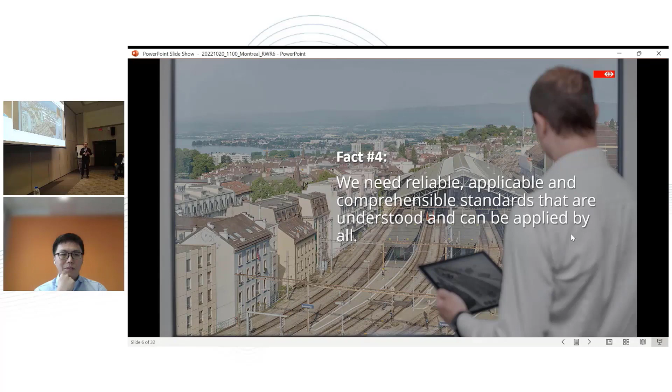Leading to fact number 5. As I said, we are a public company and we need to minimize risks in everything we do. We have a lot of pressure monetary-wise. We have to save, for example in the BIM program, 200 million francs a year starting in 2025 by using digital standards. I'm not sure exactly, maybe 200 million euros or 250 to 300 million Canadian dollars. That's quite a lot of money we have to save using digital methods. And we have controllers behind us who want to see these figures, so that's not a very comfortable position.

The most important point is we do build for operation. As a client, we don't care—well, of course we care about the planning and construction—but we need a standard for the operational phase of our assets and for the interconnected phase in operation.

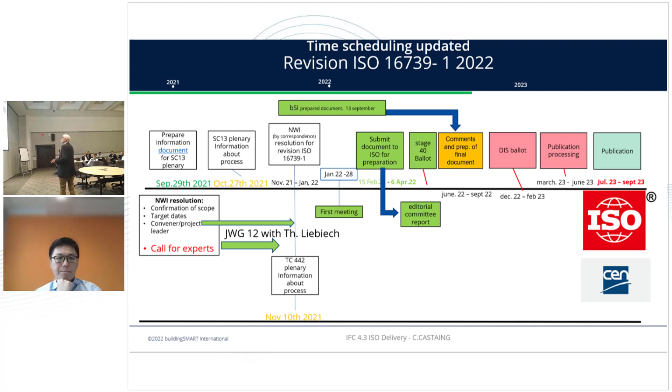So what happened between June and the 13th of September? We created this editorial committee and had several meetings to verify the content of the documentation delivered by buildingSMART, and to verify it is in line with specifications coming from ISO. The last step for the editorial committee, which worked throughout the summer, was the 6th of September, when we decided on the list of modifications to be embedded in the documentation provided by buildingSMART. Based on that decision, on September 29th, Joint Working Group 12 decided unanimously to go to the DIS ballot.

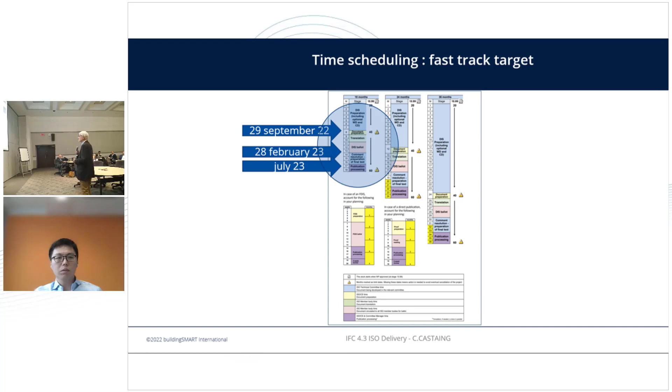I want to report also not only on the process, but the content of the process. Next slide, please, John. It's not moving, huh? There is something.

So, by memory, we had a discussion split into two parts. The first was to verify that the HTML documentation is working together with the different parts of the chapter, but also with the criteria to verify if we can obtain continuity between IFC 4 and IFC 4.3. We considered the target to be that everything working in IFC 4 has to work in IFC 4.3. This is very important because the quality of the standard depends on it. If we make the difference between authoring tool and property schema, we need this continuity so as not to break what is done by software vendors and end users using the standard.

So we proceed in this way to start with the content of the documentation, where we have a part - chapter 8 or 7, I don't remember, it is on the slide - with all of the change log. The change log explains in the documentation what are the modifications of the structure of the standard, and then to verify if we are creating a break in the structure or not.

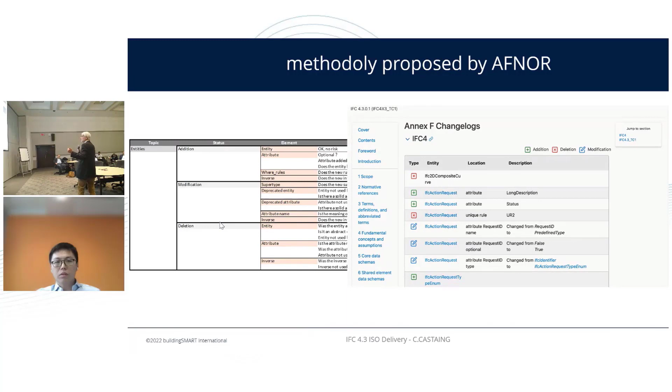So this work was done during this summer, and the result is on the next slide. That's the list of modifications on each entity needed to verify this continuity - what has to be deleted, not deleted. Deprecation was mentioned, and modification is about whether it is in line or not. Because, for instance, if we change the place or rank of an attribute, you change the compliance with the standard. So we verify that, and we come back about that. The list of modifications there.

Next slide. It's not so much - in terms of quality, it means that it's normal to have 10 to 15% of modification of that. It was less than that. So that means that it's also proof of the robustness of the standard.

And we made a second type of modification. It was what we discussed with Jim about the editorial aspect. Editorial aspect would mean only explanation about the content, and we make some improvement to be more clear about the impact of this standard on the domain and so on. Mainly, the main modification was regarding the explanation about the implementation of alignment, geodetic, and so on. It was important in the process because it was a way to give confidence to the expert of ISO about the quality of the standard, but also to have some explanation of how to use the documentation. It's really a way to facilitate the approval.

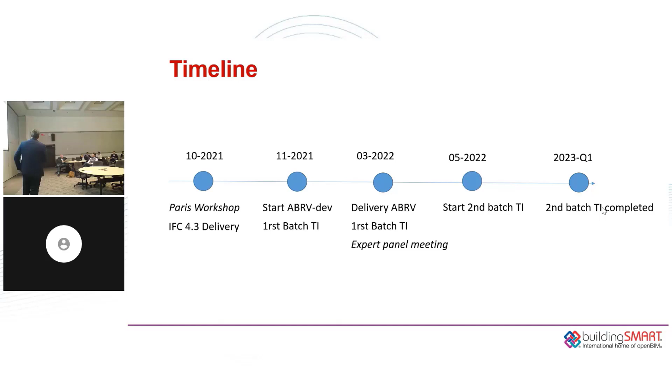We decided to have two kinds of batches for the test instructions, because we had too limited time to make test instructions covering all domains of the alignment-based reference view. So we started with the basic ones, really typical for IFC 4.3, demanded also by domain experts for rail and infra, and then going a bit deeper so you understand what I'm talking about.

As we were moving forward, there were a lot of developments also inside buildingSMART International in terms of software certification services. Now the delivery we had in March is being reviewed and fine-tuned by the implementers team, in order to define the final constraints for that. In the meantime, we're also working on new test instructions.

Test instructions are being produced now, which will be ready at the end of this year, for aggregate structures and pavement. There are also new test instructions planned for bridge alignments. So we have to stick to the project plan, and we hope to move on with this—Christophe will say something about that later on. You can go to the next slide.

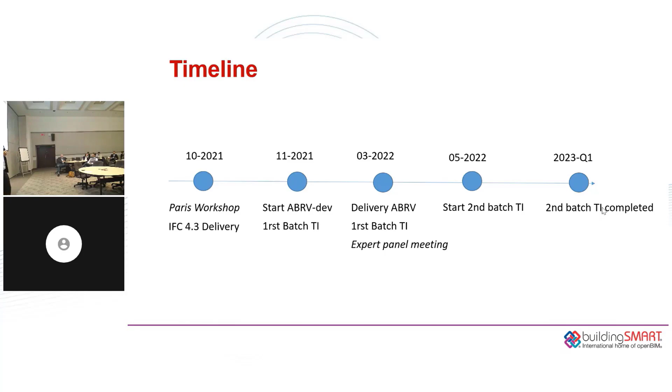When we talk about alignment—I was joining another session this morning from the rail room, and they had some business cases, and they said what's important for us is to have the linear placement. We have the horizontal alignment. We have to understand how some elements are positioned, aligned, and how they are linearly positioned. So it's about linear positioning, it's about geo-referencing—these are very typical things important for both the infra room and the rail room.

If you look at it, there's a lot of overlap, but there are some specific differences. In the infra room you also have principles about super elevation, and for rail you have the cant. Super elevation is about having some vertical differences, and the cant is about having an angle in your alignment which you should take into account.

It was important to have these principles specified as part of the alignment-based reference view, so this should be implemented by software vendors and understood—meaning software vendors should understand where to find the specific relationships inside the IFC4.3 schema, mostly represented by concept templates. So it's a matter of defining the concept templates we will need for the alignment-based reference view, and some extra constraints for doing this.

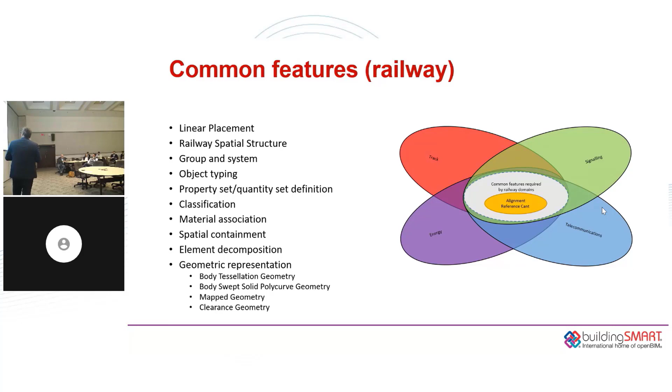So in effect, the alignment-based reference view is now a selection of concept templates, available for everyone. I have put a link on this in the sheet. From the fundamental concepts, these templates are part of the alignment-based reference view, part of the reference view. There will be some extra constraints, now being discussed in the implementer forum in order to finalize that.

At the beginning of the presentation, I talked about test instructions, because the test instructions are also provided as part of this development.

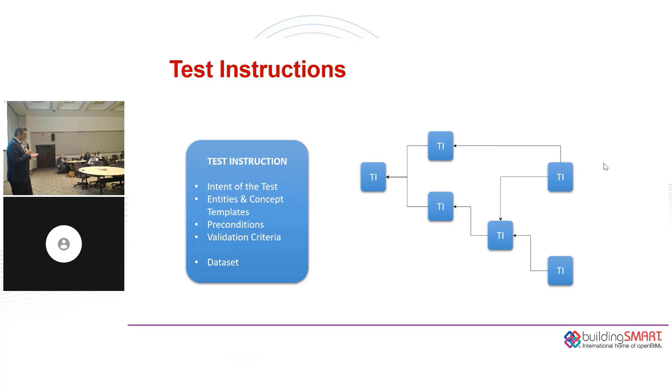The test instructions all have the same format. It says something about the intent of the test, what kind of capabilities are tested, and whether it's an import or export test. It says something about the preconditions and the validation criteria — what is being validated, which kind of rules, and what kind of output is expected from the validation process. Sometimes a data sample has been provided for that.

Test instructions can be either standalone, or at least for the rail domain, based on previous test instructions. Test instructions are built on previous ones, so that you as a software vendor can follow some steps — how to build up your implementation, and how to test that these things are working — and build on that using these sample sets. You can use the same sample set and test accordingly.

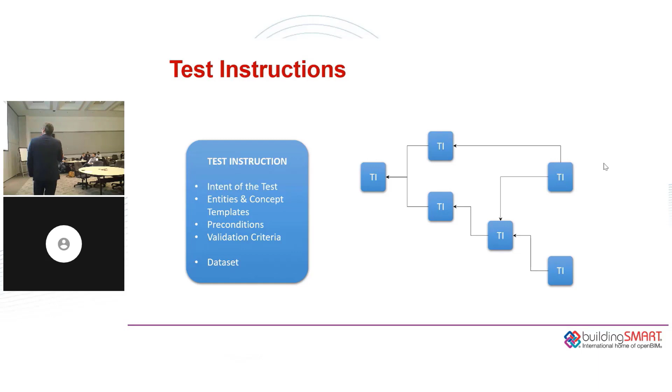Yes, the test instructions are modular and configured, so they can be expanded each time. If someone is saying they would like to have something tested, then we can make additional test instructions, and it can help both the software vendors and the stakeholders to understand and align the expectations about that.

But it doesn't say anything - it doesn't change the alignment-based reference view as being the specification of what should be implemented. It's only helping you to understand if something has been implemented correctly.

Here there's a GitHub repository where you can find these test instructions yourself. I have some examples of how it looks like. It's very specific, specified.

For instance, this is an example of two alignments without cant. The thing is, how should you, as a software vendor, know where you can find and how you can validate that you are able to produce these two alignments?

It's starting with the scope settings. This test instruction is saying about the export of the data based on the implementation - what kind of entities should be used from the IFC schema, what concept templates should be used for this one. So it's very specific.

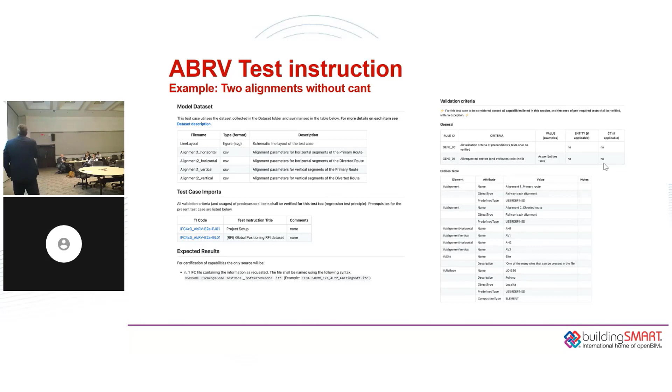And then if you go to the next slide, it says also something about the model dataset which can be delivered, so then everyone can check it themselves, and also the expected results. There are some tables with values which you can check to see if this works for you.

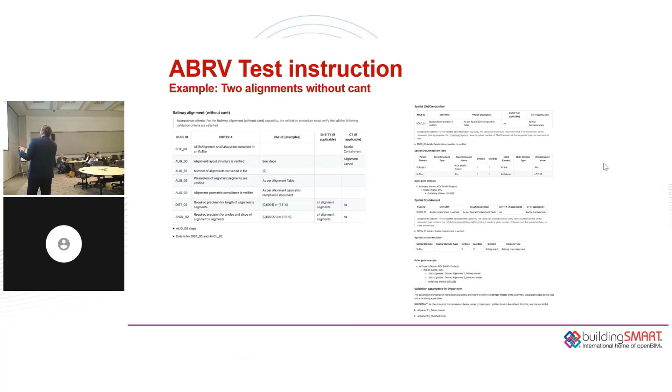This is something about the rules. So when we're talking about alignments, for instance, it says be sure that the alignment layout structure is verified. Because we are talking about two alignments without cant, be sure that you have two alignments in your file, things like that. And there are some tables showing the expected results.

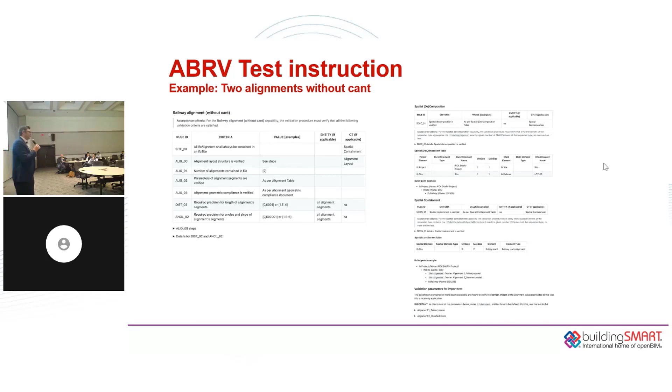So it's very specific, and should be easy for everyone to understand and use how this works. But as I said, it's not covering everything. It's just checking some principles which are important for rail and for infra room to implement.

So the last slide - alignment-based reference view is now part of IFC 4.3 because it's the selection of the concept templates which are inside IFC 4.3. It's already merged in its HTML documentation and published by buildingSMART International, and currently it's being reviewed and fine-tuned by the software vendors in the implementer forum in order to finish it.

And this is very important to have it implemented, so the various stakeholders from the infra room and rail room can use this and build their business cases on it.

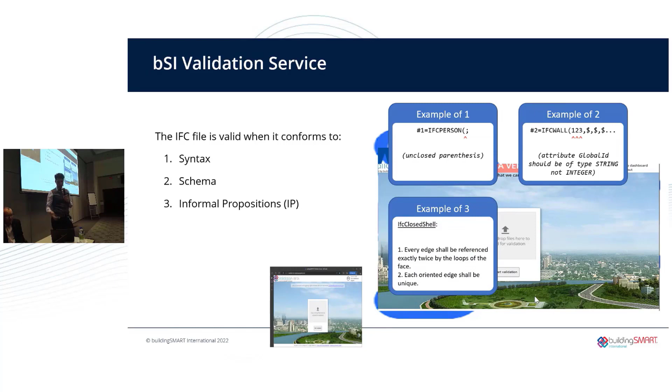Then there are a lot of other informal propositions or implementers agreements, meaning further constraints on top of the schema. They have various forms at the moment - sometimes simply text inside the definition of an entity, or informal propositions, sometimes concept templates, general usage, overriding concept templates. There are many forms, but the idea is there are two major distinctions. This is an example of a current informal proposition: every edge shall be referenced exactly twice by the loops of the face. Fairly complicated - there should be an image showing that, but something is wrong with the pictures. This is another one, the kind of agreement we find in the forum.

Agreements, for example, that there must be exactly one IFC site. At the moment there's a list of agreements - a list of plain English agreements. What we are trying to do is transform them into rules that can be read by humans and machines, so that the validation service can automatically check that the file actually has one IFC site.

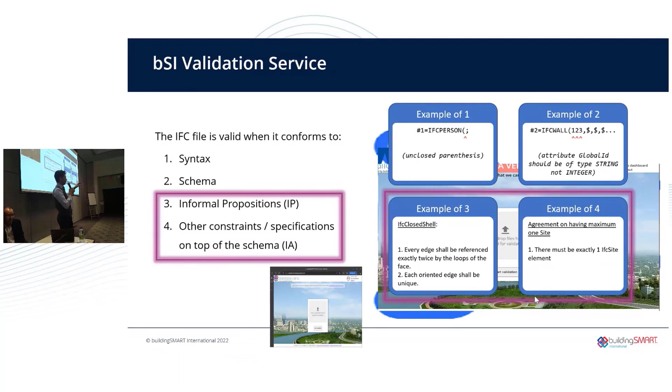So what the validation service is focusing on at this moment are these two: implementers agreement, informal proposition, concept template, general usage - whatever defines further the alignment-based reference view.

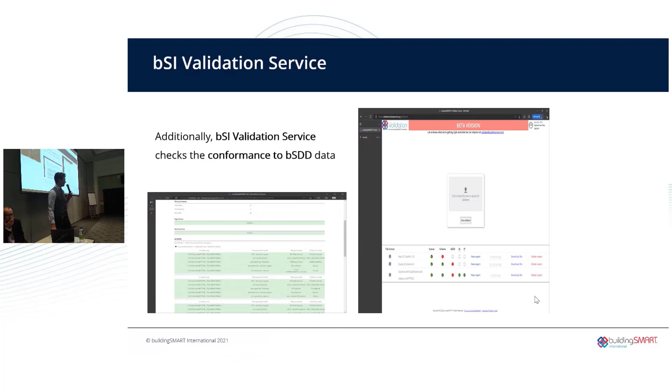Additionally, probably not as important but good to mention, the BSI validation service checks conformance with BSDD - this is more user or project focused. That's the image from before, something messed up with the image - that's the face looping twice. Just to let you know, the validation service can check the file against a BSDD. In short, if a file comes along with some definition of a BSDD and a URI pointing toward a BSDD domain, the validation service retrieves the domains from BSDD and checks that the information in the file is actually compliant with what is written in BSDD.

Again, something wrong with the image, but take a look at the diagram on the right part. So the second part of the diagram is that if you remember the first part, now you have the validation service coming into the picture. The validation service is using the rules defined by the implementers forum to check the IFC files.

To complete the picture further, what is the relationship with the BSI projects? Well, the BSI projects can contribute to the validation service by writing rules, and this is actually what Rail is doing. I think they will explain it in the next presentation.

So they can write rules, they can submit tests to the implementers forum, as Ronald was mentioning, and these tests are referencing those rules. They will create tests with a description, a title, a data set, and then they will list the same rules that the validation service will use to check the files, which are the products of the test itself. So by doing this, the projects are actually testing the standard.

And also can get some IFC sample files that are validated by the service at the same time. And most importantly, they will directly contribute to the software certification mechanism that is based on the BSI validation service, because the rules that the project will be making will be part of the same validation service.

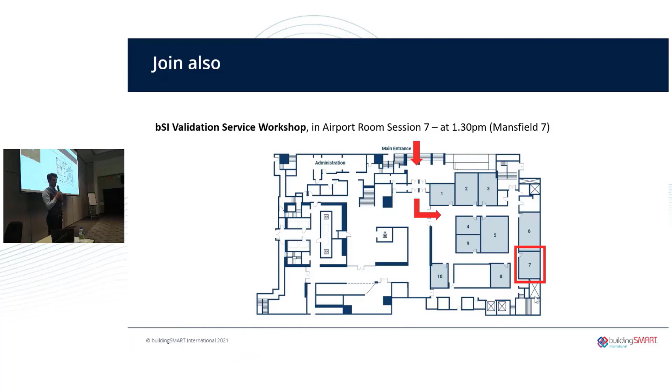If you've missed the presentation, the workshop, the bring-your-laptop session where you try to upload your file and validate it, which we had this morning, we are going to do a replica in one of the rooms below, Mansfield 7, 130, the airport room. They're going to host us for one of these workshops, so if you missed it, make sure to join and bring your laptop.

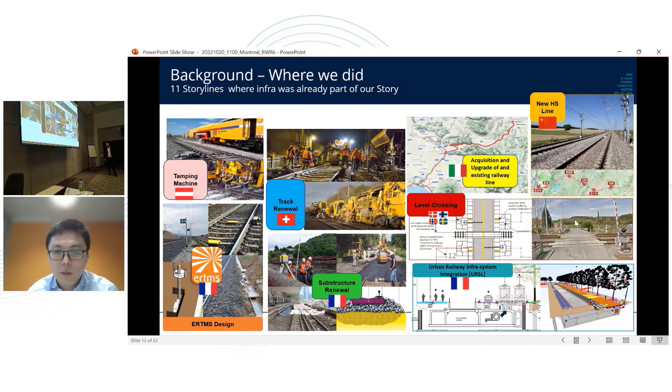Next. So we have done all these things, so what do I expect now? First of all, railway companies will very soon require IFC files as deliverables for railway infrastructure projects. We also expect functional software that supports at least BIM authoring and coordination for railway infrastructure projects - it's not only about the file, we need really useful software. As Adrian just said, we don't need people to have a PhD degree to understand this IFC file. We really need software to create IFC files and also process IFC files, and we also want to contribute to the general process at buildingSMART to qualify software implementation of IFC.

This is very much related to Evandro's presentation just now. This is specifically about validation rules for checking IFC files. In this project, we also expect the implementation for IFC-based business cases.

Okay, next, this agenda page.

This project is applying IFC 4.3 for rail. The project goal is to continue the very successful cooperation and collaboration with software vendors. We need to support the methodology for defining requirements, implementation, and validation. So this is about the method, the process work, and also the tooling.

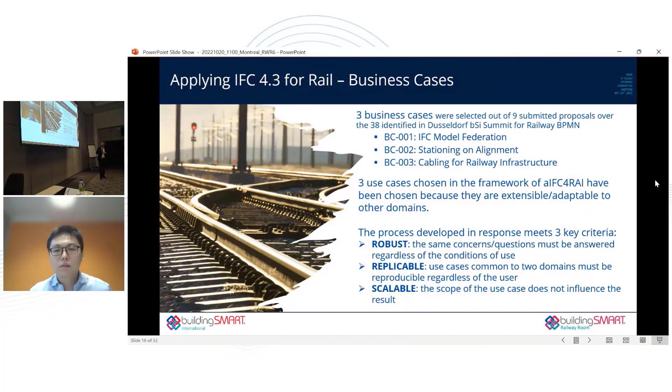If you can switch to the next slide, I will go perhaps a bit more into the details. When we are talking about the federation of models, it's very focused on the subsystems of the railway - we're talking about energy, track works, signaling, telecoms. The key message here is that when we talk about this within our own railway system, it's okay, but we are facing challenges, and we think the challenges we are trying to solve will be the same if we enlarge the spectrum and see what happens with buildings, what happens with different systems around.

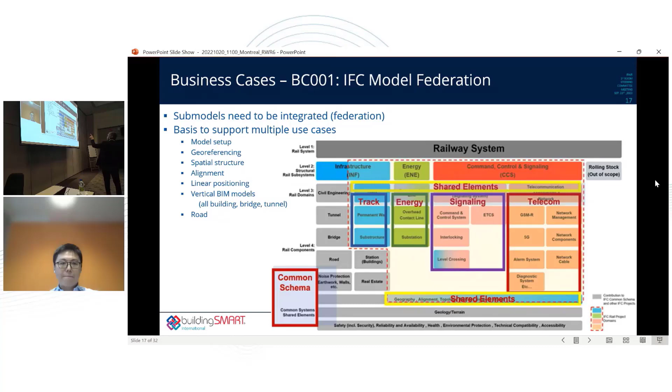So at the end, the methodology that we'll develop within this one-year program, we think that we can reuse it, and we need to also feed back this process with the other domains. This is again talking about model federation. We have this process map detailing what we expect, which will be detailed by Shi in the last part of this presentation. So that's an example of what we did and the objective of this model federation.

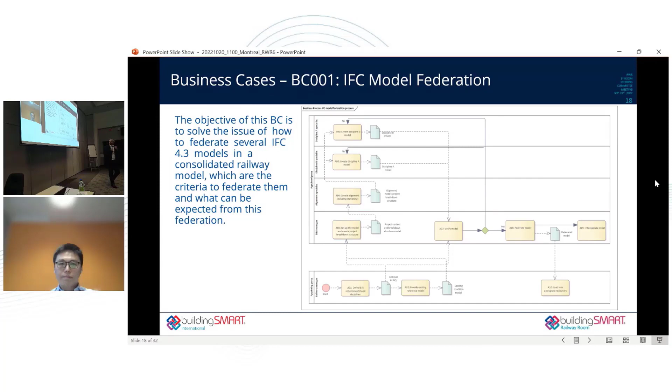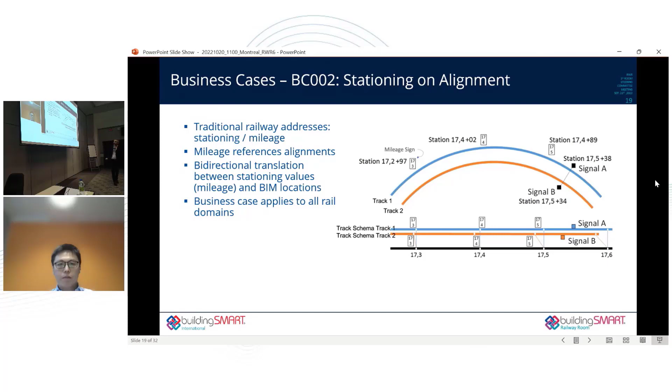The next slide is showing the stationing, the one I just gave you some details about. It's very key, very crucial for the track work and railway industry to have something fit for this very special purpose. It can be applied to bridges, tunnels, perhaps the tarmac of the airport, or many things. The only thing is, with railway, we have this challenge of having one track, another track, perhaps a third track, perhaps something crossing both. That's where we think we can bring something to other industries, because we have perhaps the most constrained environment for this question of what I call chainage, what others can call mileage, or we can have this discussion about the wording.

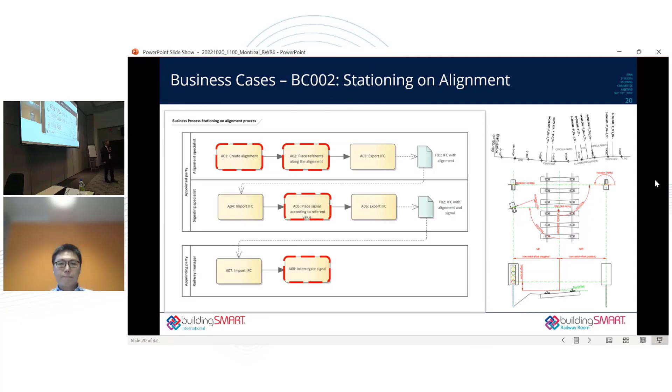And the last one is to interrogate the equipment. It can be a signal, it can be many things around drainage items. Here it is to interrogate this item and to have the right information, basically to have the XYZ and also the mileage based on the track.

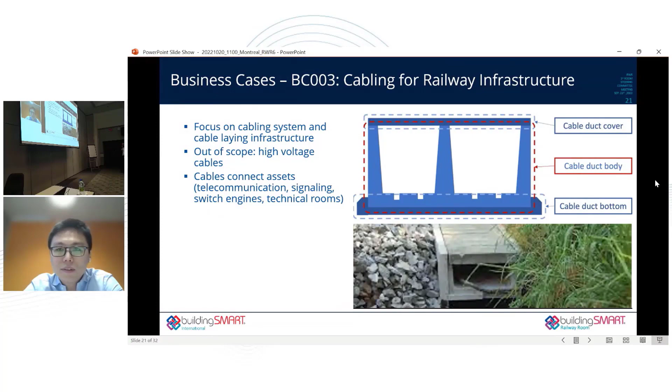That's the last slide. So Etienne, I guess, could go to the next slide. Yeah, don't have the... yeah, thank you for that. That's the layouts and the challenges we have. Yeah, I'll let you finish. Sorry, okay, I'll try to catch up very quick.

Okay, that's the first part about the project method. One part of this project is to define a method. So we have these three business case works, and also we need to have a process to define the requirements for these business cases, and then continue this process to implementation, then to validation.

We also get a lot of requirements and challenges from stakeholders about this method. First of all, this method needs to be general, applicable not only for these three business cases, but also usable by stakeholders to define further use cases. We expect to use this method to support defining requirements in contracts. It should also support automatic rule checking for IFC files, support defining requirements for functional software features, and ensure the quality of this process. It should also ensure traceability between requirements and validation methods. These are all the requirements and challenges that we have received from stakeholders and domain experts.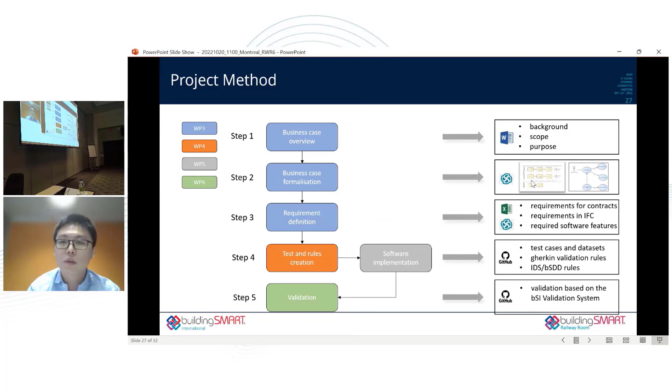So regarding tooling about these things, for the first step about the business case, we would use just a text document about the background, scope, and purpose. Then for the business case, we would use Enterprise Architect to define process maps and also define use case diagrams. Etienne has already shown some process maps.

And then we would go further to define requirement definition. We will also use Enterprise Architect to use SysML to define requirement diagrams. Then all these things will be linked to test cases and rules. We would use GitHub, mostly the GitHub from the Implementer Forum, to define test cases and data sets, and also use the BSI validation system to define gherkin validation rules, and possibly also IDS and BSDD rules.

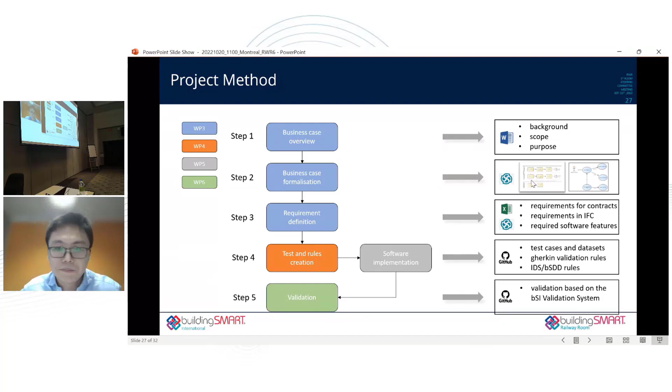This is some challenge actually, we would like to coordinate between the business cases, because there would be a lot of redundant requirements. So we would like to keep the requirements consistent among these business cases. This will also make it easier for us to define test cases, and later on also for software vendors to more straightforwardly create IFC files. So we need to do some coordination.

So all the requirements are collected in a central repository, which we call the requirement specification. Based on the requirement specification, we will define test cases and data sets, and then create rules to check the produced IFC files. Next.

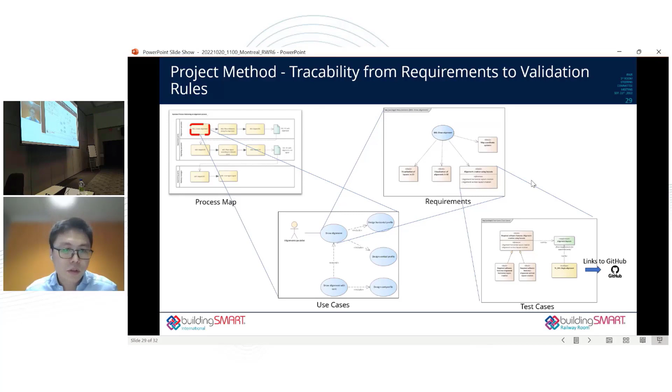This method also ensures traceability from requirements. From the process map, we trace the process map to the use cases, and each use case will have specified requirements, and then requirements are linked to test cases, and test cases are linked to all the specified data sets and specified rules on GitHub. So we use this kind of way to ensure traceability from requirements to validation.

So the next step is that we have all these business cases ready, and also this method. Of course, during this process, we will continue to improve and further specify the business cases and also improve this process. Now we really would like to call for participation.

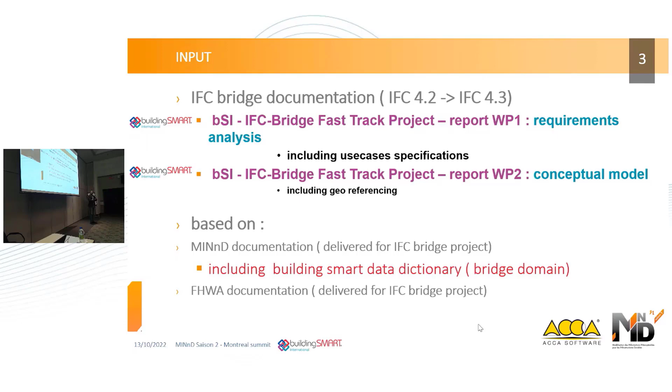Next one, and I think this will be very, very important — the final step of this project. So what are the objectives? To define the exchange requirements regarding the question of alignment and georeferencing and what is specific for bridges.

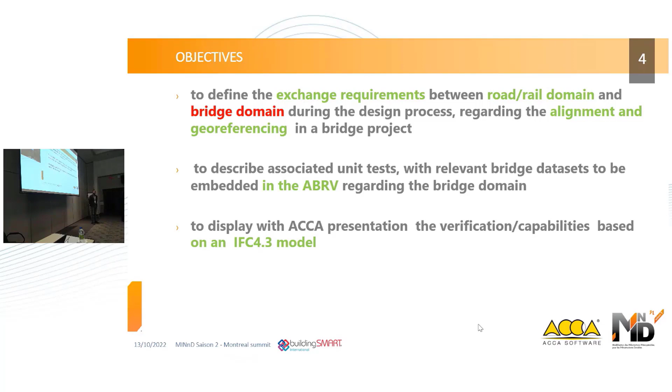What we are going to show is something important, representative of 70% of usual bridges. It's not very special, but it's very important because it verifies that for existing assets, it could be used relevantly. And that is very important.

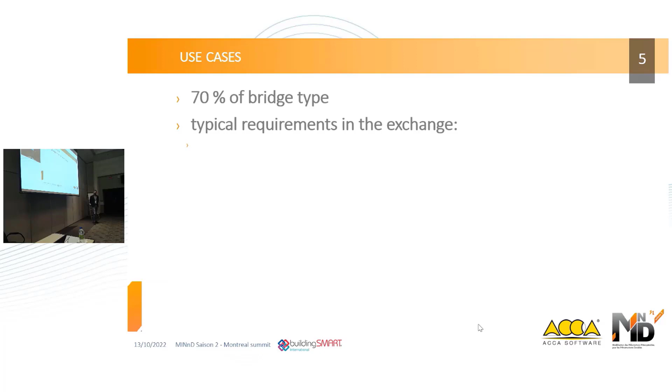And what we are going to show is what is very typical in terms of requirements to be exchanged with the different steps of design. So I'm going to show what we want to test, and we will verify with Michelangelo where it is.

What's very important to show is that on the bridge you have two alignments, at least two. The first one is the alignment coming from the road or the track, and the alignment of the bridge itself. That's second, and that is very important.

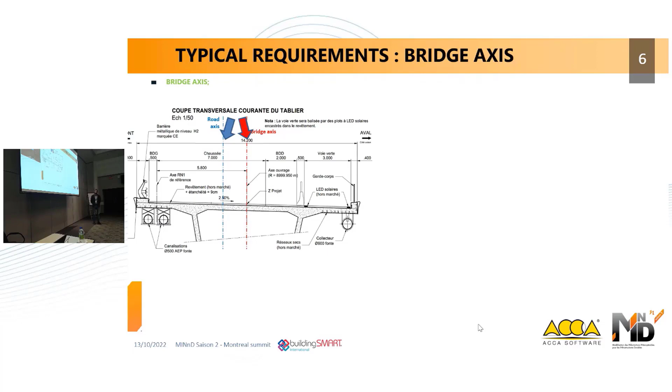Then you also have some other elements of alignment.

You have on top the level and the alignment of the road, including pavement. If you want to apply that to the bridge, you have to take into account that the bridge is designed without the pavement. All of the references are not related to the red line coming from the road, but to a dedicated red line deduced from this one, which is what we have to test.

That's the reason we say there can seem to be some redundancy, but in reality there are details to be verified. So take care when talking about redundancy of the test, because as was said, the devil is in the detail.

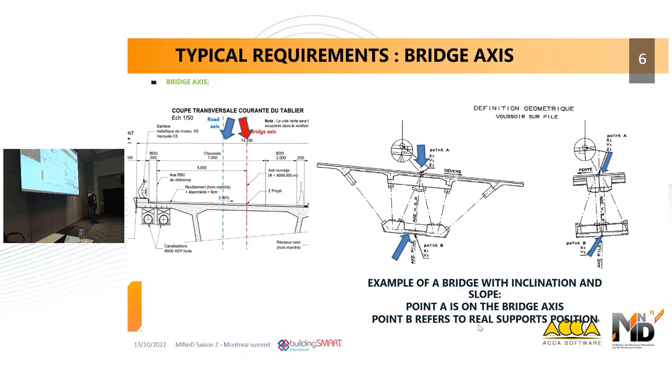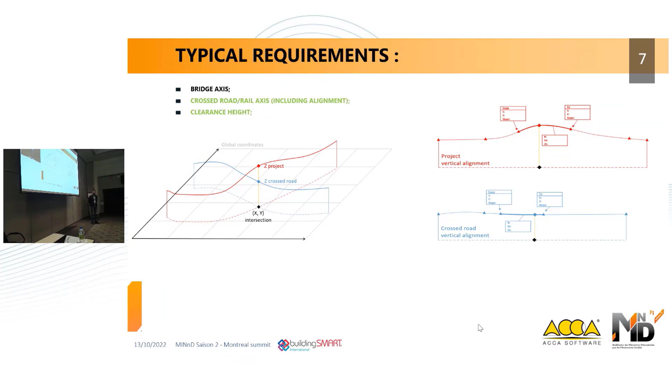What we also have to verify is that a bridge goes across something. So we need to be able to verify the clearance between the existing structure and the new structure, regarding the verification about the crossed road and the vertical alignment.

And also about the clearance, orientation, and so on. So we need all of this detailed information combined with the existing, sometimes existing, or another structure regarding that.

And then on the bridge, you have at least three references. The first one is the global coordinate geodetic—it's not Cartesian. I want to insist on that because there is confusion in the IFC documentation about it. They are using IFC Cartesian to speak about what is not Cartesian, but geodetic. I think that will cause some trouble in the future with that. We have to take care about that.

You have the local Cartesian to be used, of course, because most structures are designed in a local coordinate system, and we have to represent that in the global geodetic coordinate, plus the linear referencing.

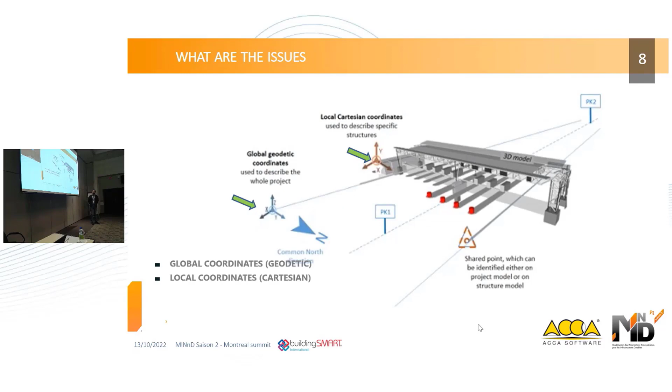In linear referencing, you have stationing and chainage, but you also have measuring. We are going to show that with Michelangelo—chainage, station, linear placement along the road/rail.

So the next presentation will be in three parts. The first part is to show the spatial decomposition of a bridge. Secondly, the aspect of georeferencing. And third, the question of reference to the semantics of the bridge and so on.

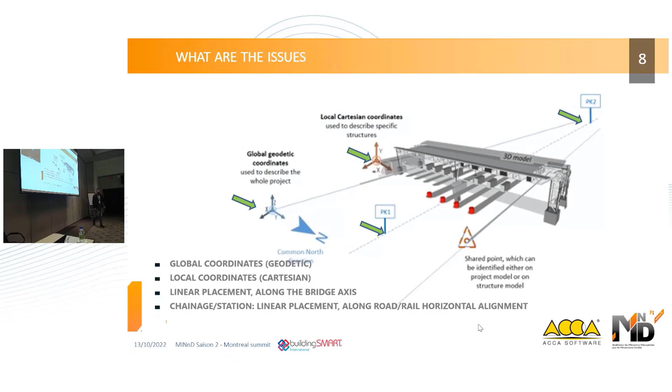Thank you, Christophe.

So yes, let's start with the bridge spatial structure and the object decomposition, which I think is quite an easy thing. Next slide—it will be a video, if you can play it, please.

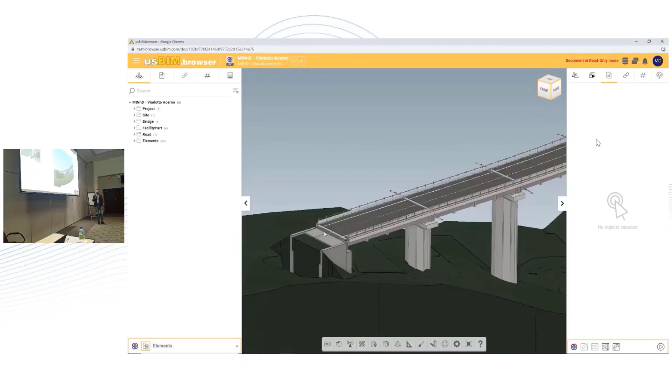This is not the video, of course. This is it.

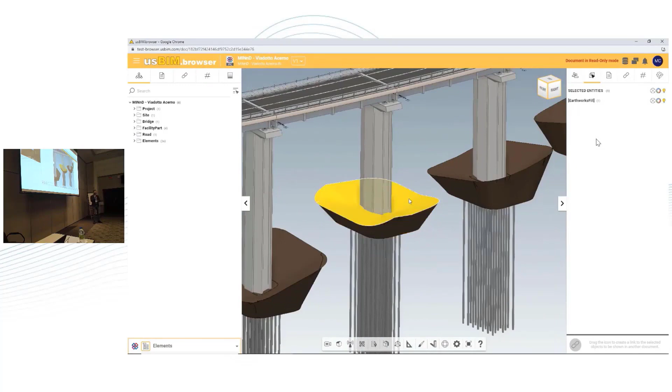So what we have done is taken the test instruction from Christophe, and we tried to implement it, given our experience in other IFC 4.3 projects of rail and infra. The good thing about this standard is that the same concepts apply regardless of the kind of linear infrastructure you are designing. So alignment and other stuff will have the same meaning, and we will see this in the examples.

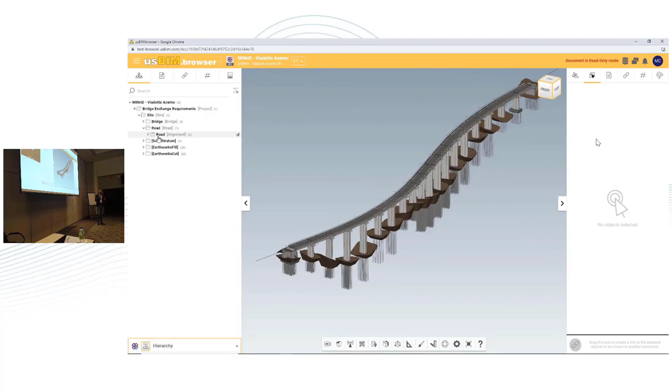What we have done is try to implement those concepts from the test instruction. Let's start with the spatial structure, which with the new standard, IFC 4.3, is very flexible. There is nothing special about it in this example because there is no special need for this model in particular, but based on your use case, the user can go as specialized as he wants.

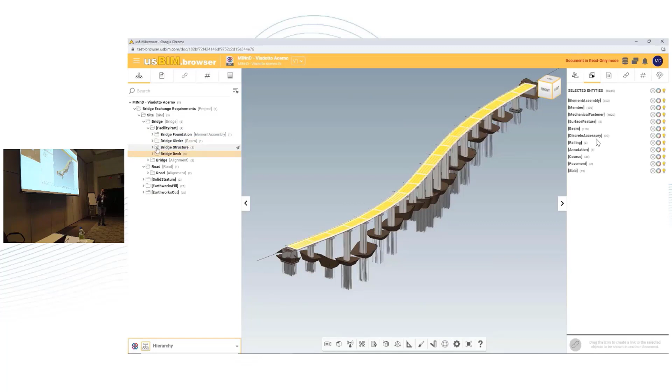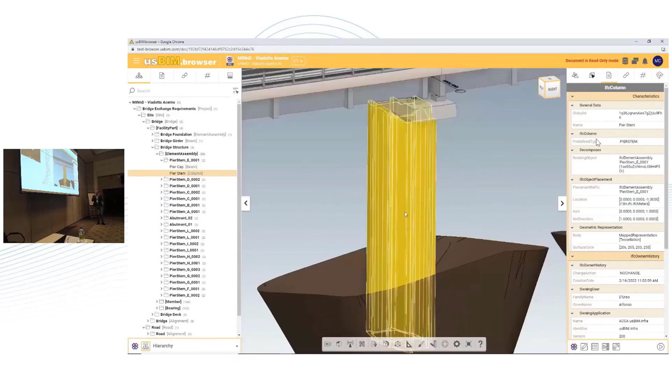Here we have only the bridge foundation, girder, structure, and the deck as facility parts of the IFC bridge. And then we have object decomposition, so each element assembly is part of those spatial structures, and may contain different objects. For example, for the bridge structures, we have the assembly with the pier cap and the pier stem. Everything is mapped according to the new schema, so classes, predefined types, attributes and so on are the proper ones. This concept of object decomposition and spatial decomposition applies to every part of the model.

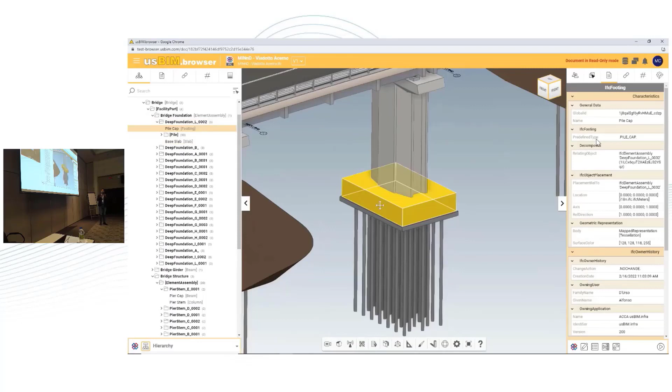Here we are at the foundation. Again we have the assembly, and here we have a decomposition of the pile cap, for example the base slab, and each pile in this example has been designed on its own. Again, everything is mapped according to the new standard. Nothing special here.

Why could we start with that? Because the question of decomposition means that everything we're going to show after that has to also be applied for the full breakdown of that. That's why we are specific in the test instruction, and where the difficulty comes for the next step of the project is to define the methodology of testing and to accept the result of that. That is still to be done.

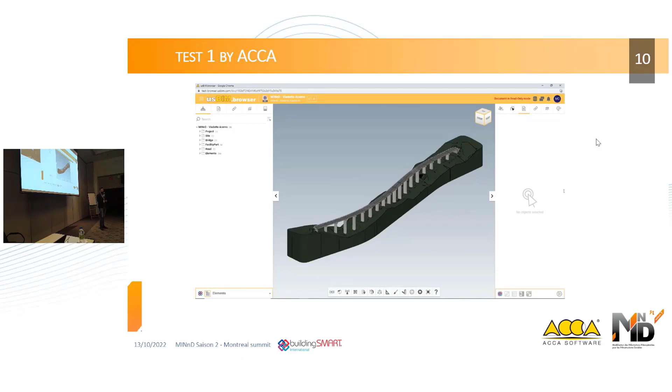Yes, next slide. Let's go more into the IFC 4.3 core. Let's see about the road alignment, local and linear placement along the alignment, and the project global positioning. Next slide, it will be a video.

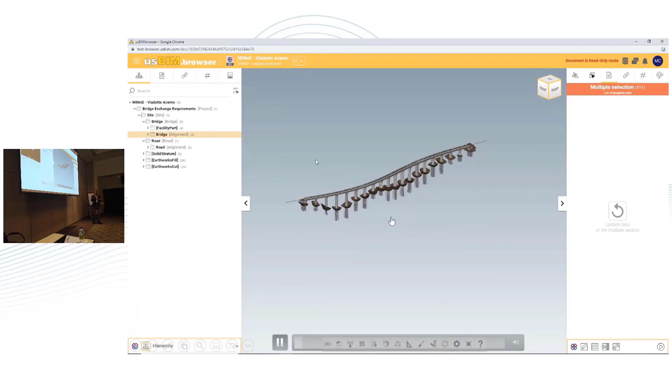We have talked about two different kinds of alignments, and here you can see that we have the bridge alignment and the road alignment that are one on top of each other. As we said, the bridge is modeled without taking pavement into account, for example, so one can refer to one or the other depending on what he or she has to model.

Another good thing about the standard is that the alignment is defined semantically and geometrically, which means it is decomposed into all of its segments with all the data available semantically in the IFC model. This is good for end users, who have their data in a standard way, but also for software vendors.

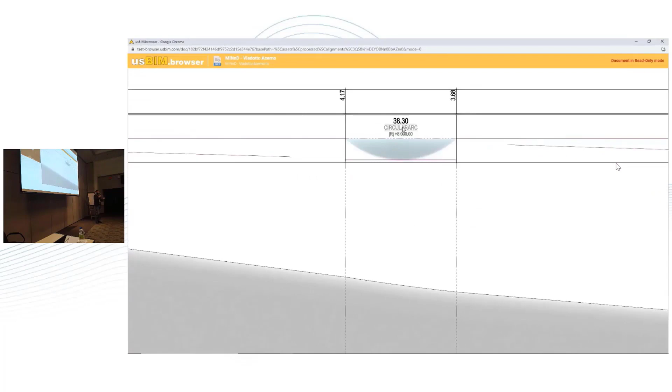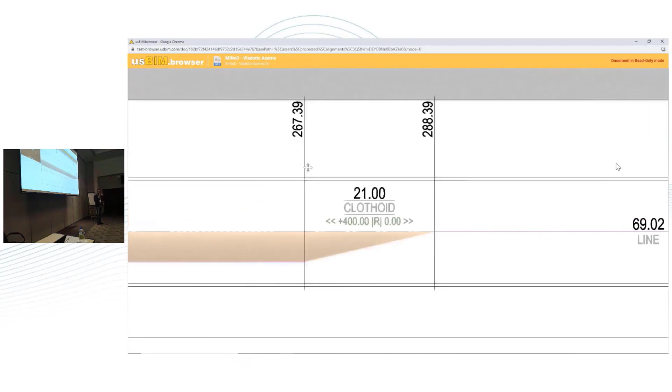We can create functionalities about this, for example to extract data and create drawings. This is useful for the stakeholders, because we found during the storylines that we produced in other projects that this helps the stakeholders a lot to visualize their data, since they know how to read their data in this way with the drawings.

Here we are going ahead with the examples. Here is the super elevation. We used IFC annotation and the super elevation events. Here is the use of referent and linear placement, which will tell you the mileage along the alignment where this object is placed.

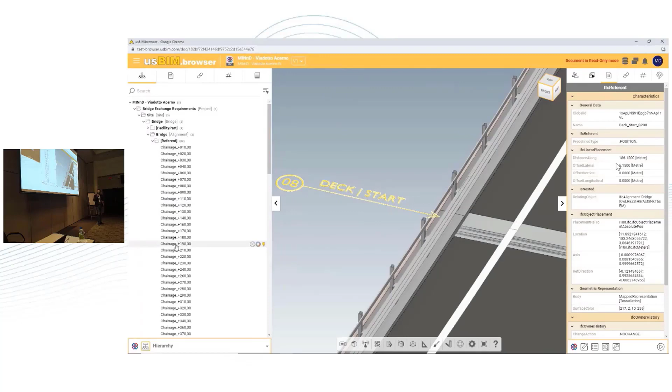We have seen this in the previous slides from Christophe. Here we have the chainage example. Again, we can place along the alignment with the use of linear placement, so we have the mileage. Geometrically it can be anything really, but the important thing is that the semantic information is in the file.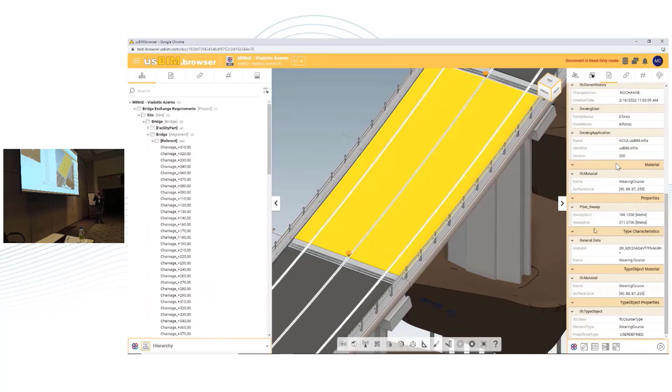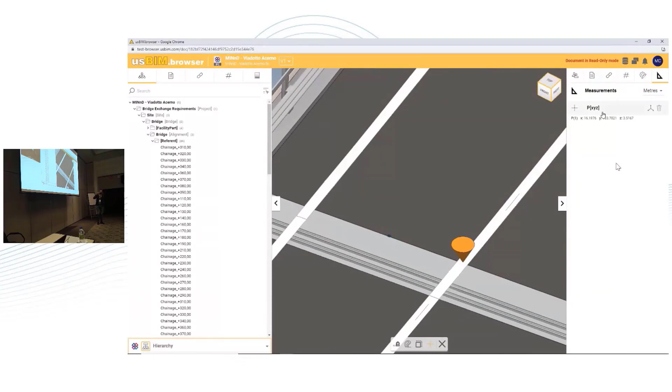When it comes to geometry, there are different kinds of things we can do. This is a sweep along the alignment, so we know where this sweep, where this slab starts and where it ends. And we have seen about coordinates, so of course we have local coordinates, so we can see the local coordinates of the object where it is placed.

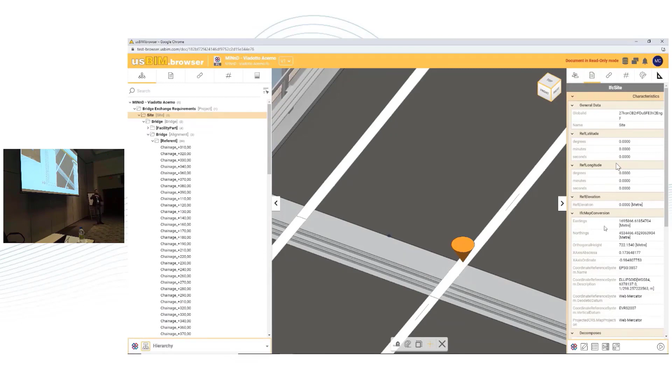But also on the IFC side, we have data about map conversion whenever we want to go from the local coordinates to the geographical coordinates. So the data is in the file, and you can go and transform the coordinates accordingly, given the information in the IFC model. The other slide will be the last part. Next slide, please.

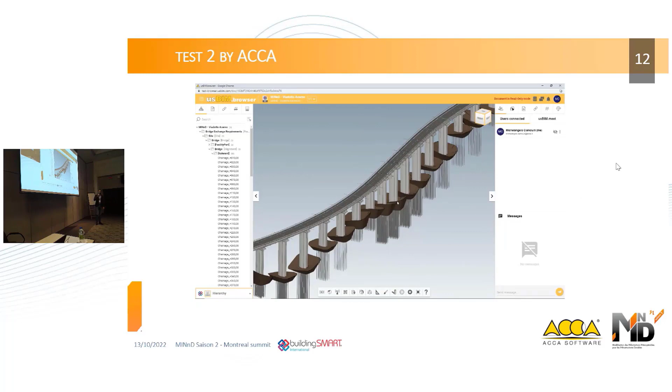It's about properties, because we have seen mostly semantics and relationships and the geometry, which was an acceptable level, depending on the use case. It can be more or less detailed, but we like to keep geometry and the data separated. So we also have to add data and meaning to the entities of the model.

So what we have done is that we have used a connection to the BSDD, and in particular, we have used the MINnD bSDD to classify and put some properties on the entities. I don't know if Christophe wants to say something about the content, the actual content of the MINnD bSDD.

So the content is very simple. The content was done during the process of developing the IFC bridge, and we are using part of the documentation coming from US again. That means that it's possible to compare the definition, and also part of the approach to implement a certification.

That means that we have to combine at one moment the geometry and how we can attach the semantic for that. So I agree with Evandro that it's not so simple, but with the fact that we have the question of BSDD and the possibility to plug directly to BSDD, it's a way to simplify the methodology and to just have to work on the requirements of what we want to verify.

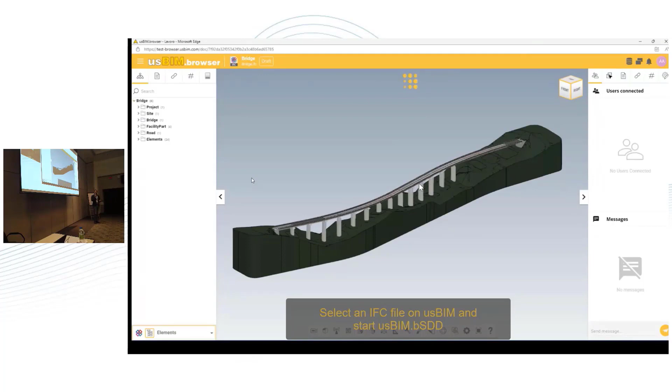It is about the connection to the BSDD, as we said. We add this model, this bridge model, and then there is the MINnD bSDD. So what we can do is that really the point is that you can take an IFC file produced by any software, any authoring tool, and connect to the proper BSDD. In this case, it is the MINnD bSDD, and you can start doing the search in the BSDD, and you will be able to select the objects and start applying the classification.

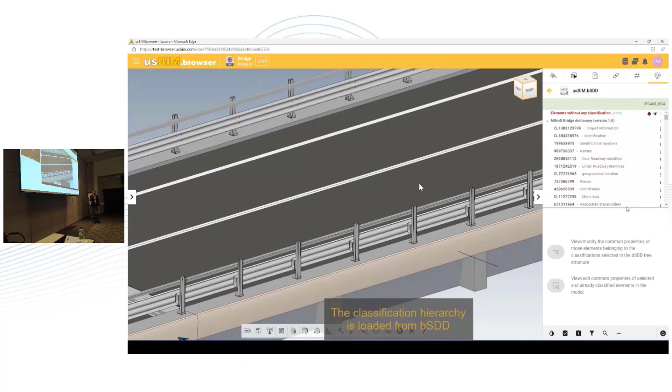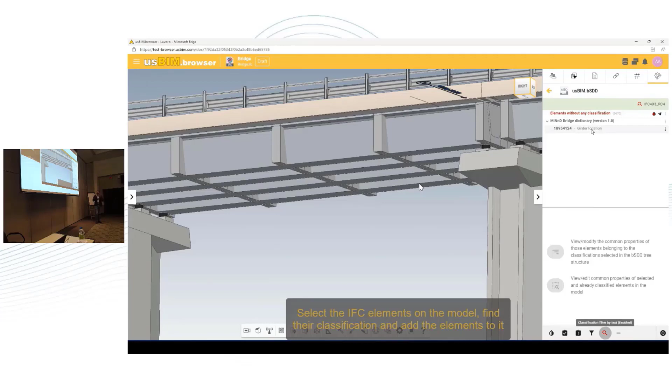So here we are just connecting to the BSDD service from buildingSMART. This is the hierarchy, it is a flat hierarchy. In the case of the MINnD dictionary, there are other domains which have a hierarchy, like parent and child relationships as well. But the important thing is that you can look into the dictionary and apply those classifications, so you can start classifying your object with your classification.

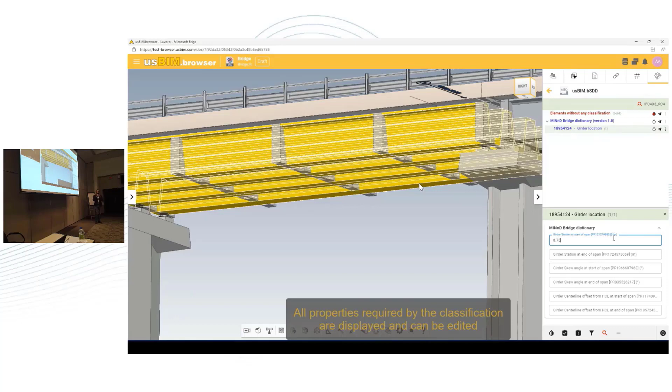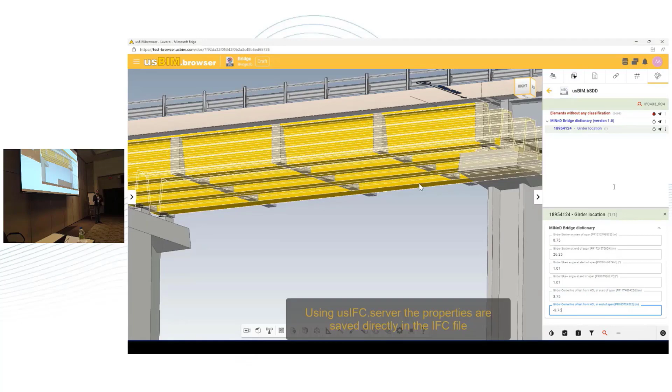And what the bSDD allows you to do is give you the property sets and the properties that you need to put the values in. This is a good thing, because this workflow ensures the quality of the data, since you cannot go wrong. There are no possible mistakes, because the information about the properties, their names, their codes, are in the bSDD, so everything is automatic. This means that the quality of the data in the model will be very high.

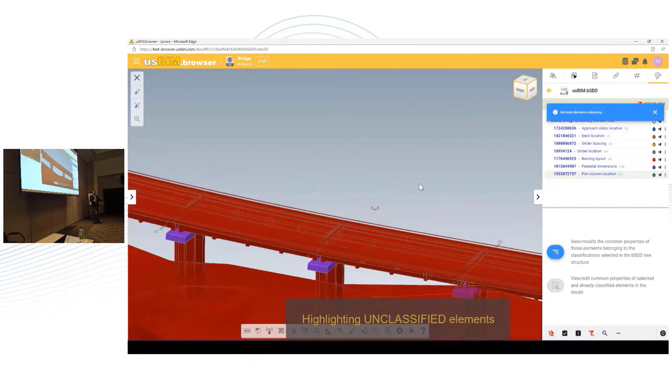And then there are a lot of functionalities, of course, this is more about the tool. You can see what has been classified, you can assign a color scheme, and so on. But the important thing is that the user can always, at the end, download the IFC model or use OpenCDE APIs to go to the next step.

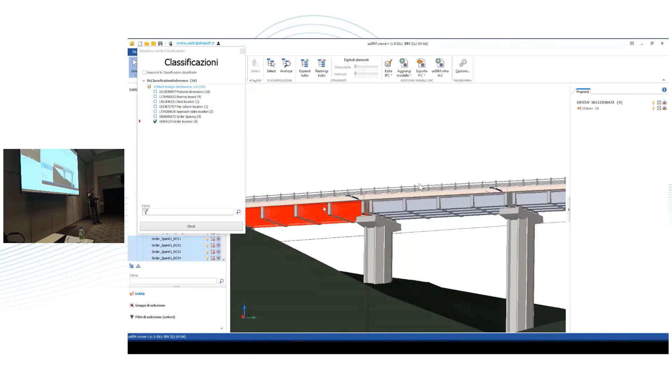Because if someone asks you to classify some IFC models using bSDD, it's probably because you are in an OpenBIM workflow and you are only part of this flow where you will hand over this model to the next step, maybe for validation, maybe for aggregation of different models, or maybe for further editing.

So that will be it for my side. I will hand over to Christophe for any conclusion. Thank you a lot, thank you a lot.

I think, I mean, I was very impressed by that because we work with that. And I want to dedicate this presentation to Professor Yabuki, who was the first one to think about IFC for bridge. And now where we are, we succeed, Professor.